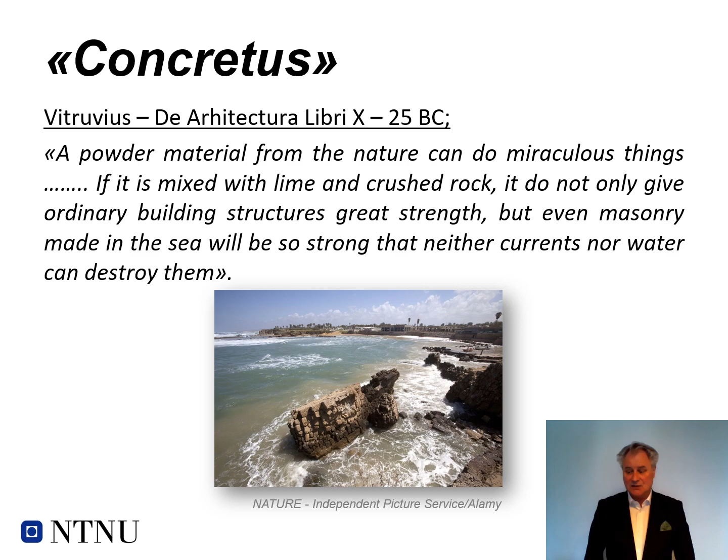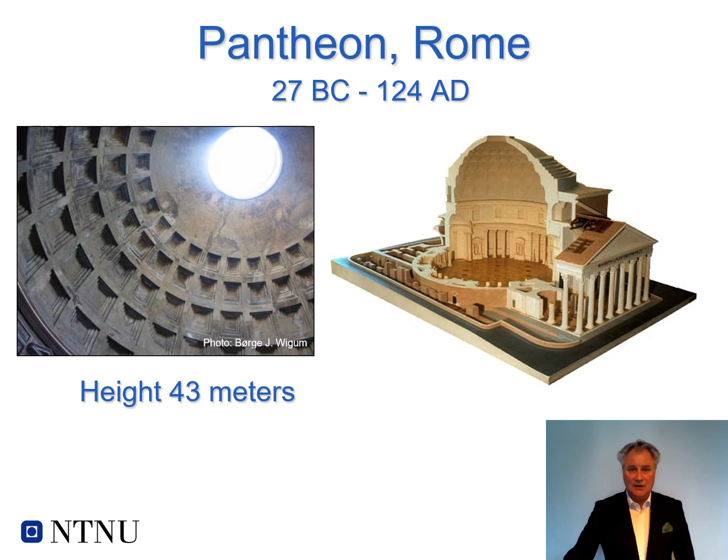Concrete is a flexible material. You could shape it in the way you like, and it's very strong and very durable. In Norway, we have quite a challenging infrastructure, with roads along the coastline, etc. So in that sense, we are very dependent in Norway on using concrete as a durable material.

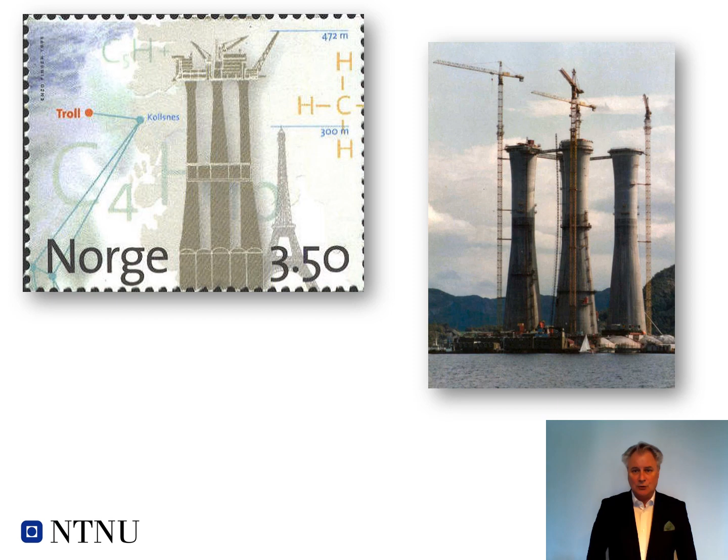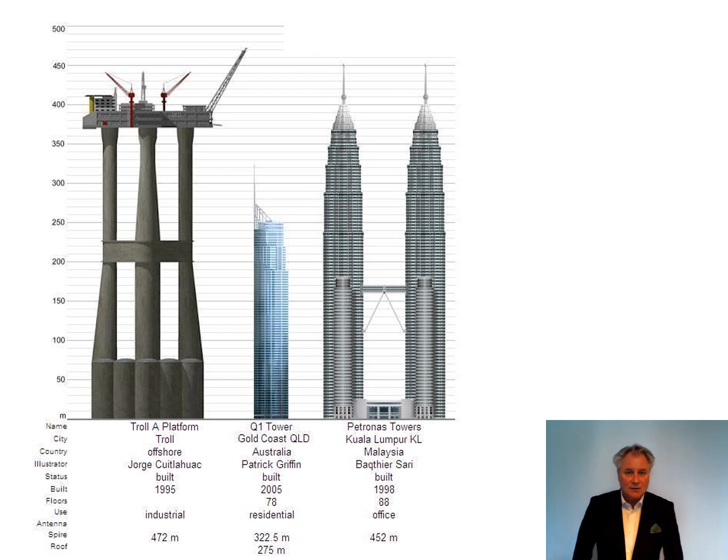Also, when we started to drill for oil in the North Sea, we needed some big structures. We built the Troll platform, which is actually the biggest ever movable structure in the world. As you can see here, compared to the Petronas Towers in Kuala Lumpur, the Troll platform is more than 400 meters high.

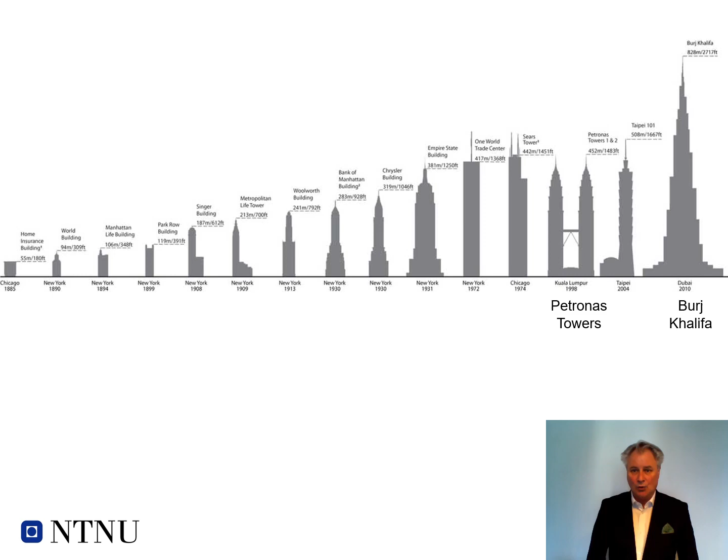However, comparing the Petronas Towers with other buildings made of concrete in the world, you see that even the Petronas Towers are relatively small compared to the biggest or highest building in the world, the Burj Khalifa Tower in Dubai. The Burj Khalifa Tower, with its 828 meters height, needed more than 330,000 cubic meters of concrete, equal to around more than 37,000 trucks of concrete to build this structure.

But what made it very special in this structure is that even though it was built in the sand desert of Dubai, they needed to import sand from Australia for use in this concrete. Quite remarkable.

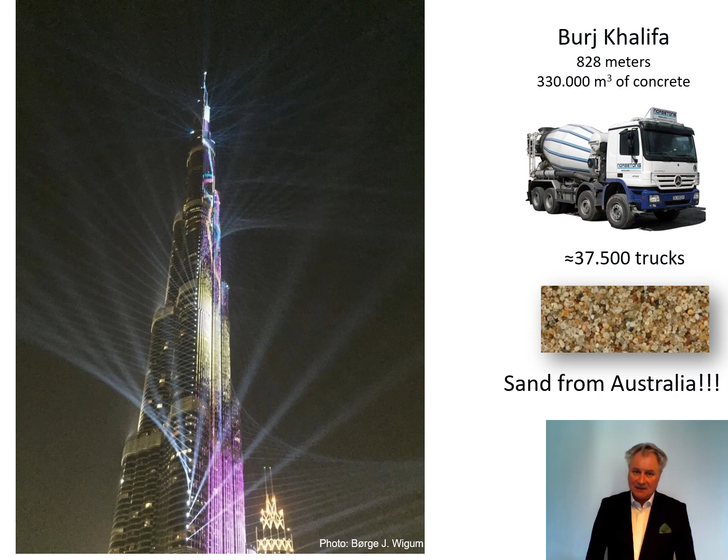So today we're talking about concrete, and concrete is the second largest global commodity by volume in the world after water. Every year we are casting a typical 3.5 tons of concrete per capita in the world, which equals around 1.5 cubic meters. That means up to almost 25 billion tons for the 7 billion population of the world.

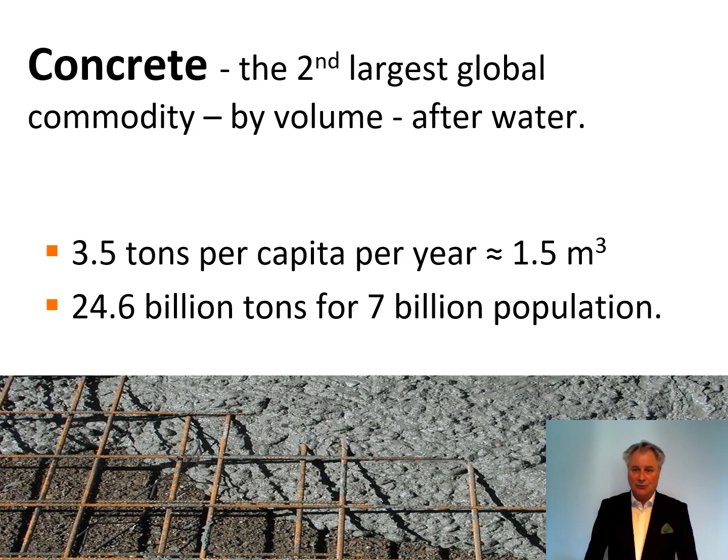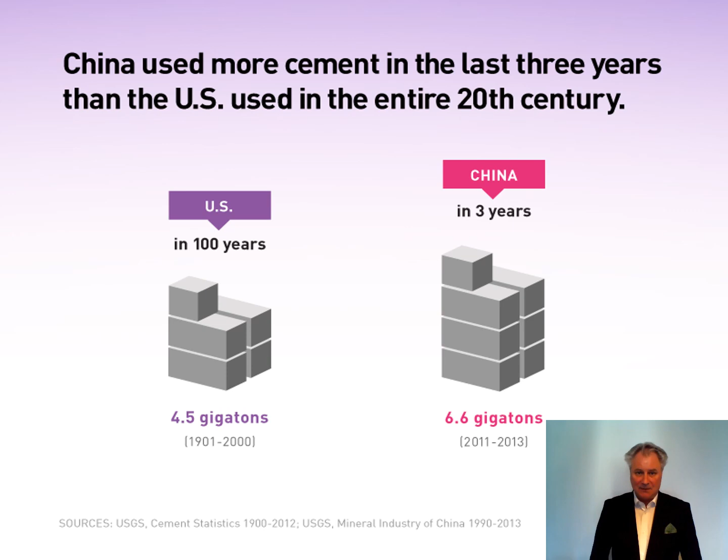So we see a big development in the use of cement, and let's look at how concrete is built up. Concrete, of course, is glued together with the aggregates, and the glue is the cement and the water.

A typical concrete mix could look something like this for 1 cubic meter. You have the cement, around 350 kilos. You could have a coarse aggregate, which could be 16 to 22 millimeter particle size, almost 600 kilos. And you have the slightly finer coarse aggregate, 8 to 16, around 330 kilos. Then you have the sand fraction, typically 0 to 8 millimeters, around 945 kilos. And then you add the water to the cement, giving a water-cement ratio, in this case around 168 kilos of water.

In addition, you could have some different admixtures, etc., and you end up with this concrete mix with a typical density of 2,380 kilos per cubic meter. Please note that the aggregate is a very important part of the concrete, as it counts up to 70 to 80% of the concrete. So this is the typical mix of concrete, and as you realize, the aggregate part of the concrete is definitely very important.

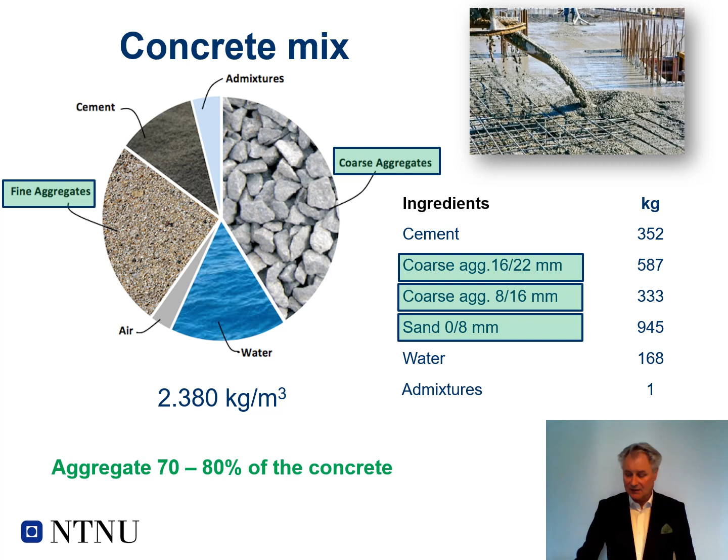Why is it important to know about concrete aggregate? Well, aggregates are approximately 70 to 80% of the volume of the concrete, so they will be critical for the properties of concrete, both in the fresh state, during setting, and finally in the hardened state. We'll come back to that.

We've also seen that concrete strength has increased in recent years with all the new infrastructure - platforms, bridges, dams, etc. There is more demand on the strength of the concrete, and consequently the quality of the aggregates used is more critical.

We also see today more focus on durability aspects. We want the concrete to last, like the Romans, for decades and longer. So we are looking into, for instance, freeze-thaw durability, and there has been particular focus on alkali aggregate reactions during the last 20 to 30 years in Norway.

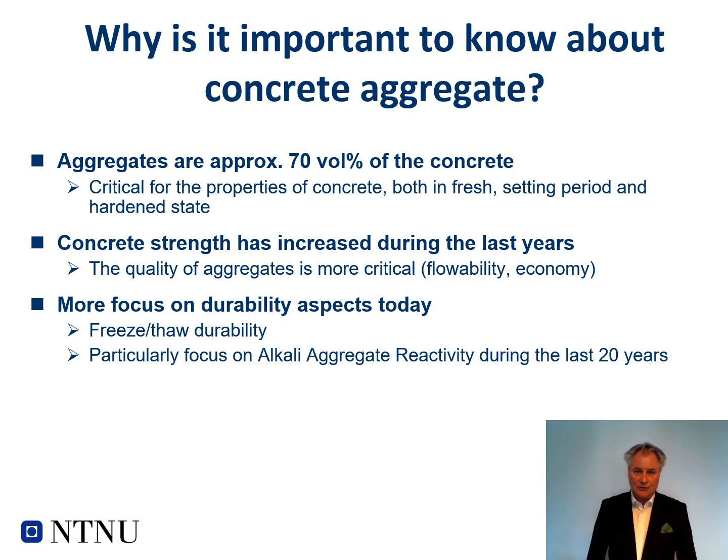Please have a look at another presentation where I'm particularly focusing on the alkali aggregate reactivity of aggregates in concrete.

It is also important to know more about concrete aggregates because there's increased competition with other materials, and we need to look into the economical benefits of concrete materials, etc.

We've also realized that even though we have a lot of bedrock all around, we've had in Norway a lot of natural sand and gravel after the Ice Age. But we are now realizing that many of those resources are depleting around the main markets, the main cities, and so on. So we are seeing an increase in use of crushed aggregates, even in the sand size fraction, which we call manufactured sand.

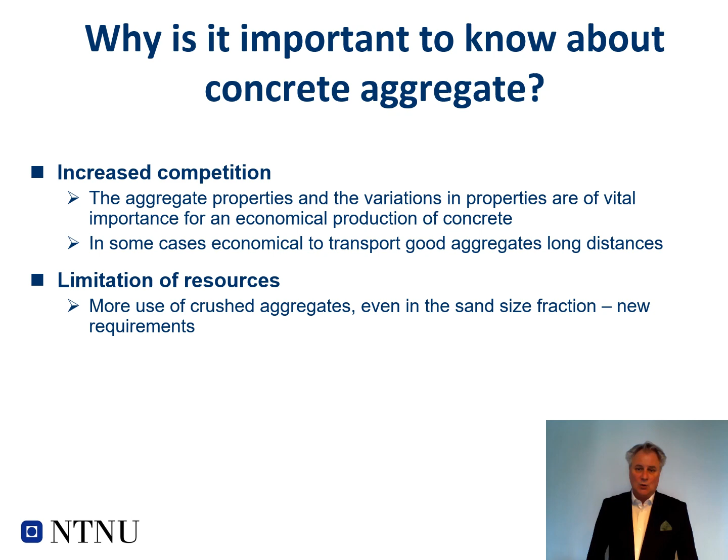And for these new crushed aggregates, there will be some new requirements and new challenges, as well as for typical aggregates for concrete.

When we are talking about fine aggregates, this is what we call sand. By geological definition, sand should be less than 4 millimeters, but typically in the concrete industry they talk about sand less than 8 millimeters. As I said, up to now in Norway we have had typical natural sediments - glacifluvial and fluvial sediments - that have been used.

But when using natural sands, we do need to take the petrographic composition as received, because it will be a mixture of different rock types that have been crushed down and sorted by glaciers and rivers. We have typical gradings used in the concrete industry, such as 0 to 4 millimeter grading, 0 to 8 millimeter grading, and so on.

And in addition to this natural sand that has been used for decades, we also now realize we are able to crush bedrock and produce manufactured sand from that bedrock.

Then we have the coarse aggregate used in concrete. By definition in geological terms, coarse aggregates are coarser than 4 millimeters, but more typically in ready-mix concrete production we are talking about coarser than 8 millimeters.

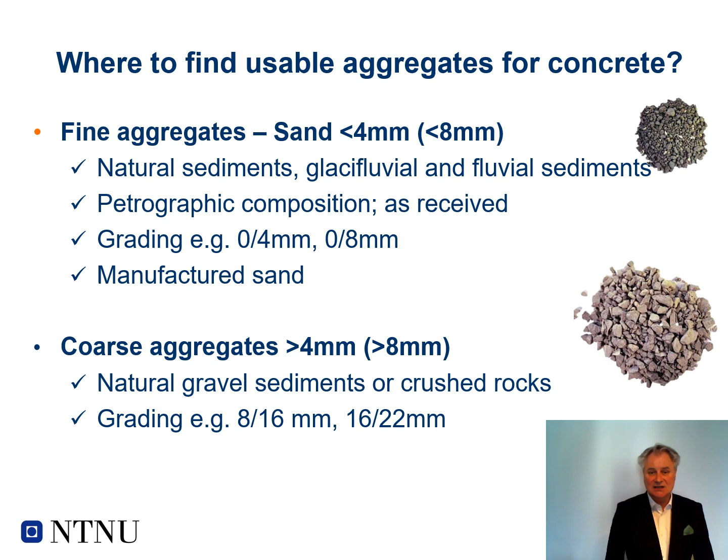We could also have used natural sediments, natural gravel, but it's more and more common to use crushed rocks for these coarse aggregates. Typical gradings could be in the range of 8 to 16 millimeters and 16 to 22 millimeters, and so on.

So what kind of factors will govern aggregate quality? First, we have the geological origin, of course - the bedrock, the type of minerals in the bedrock, etc. So that is the rock itself.

Then for natural sand and gravel, we have the transportation and deposit conditions and so on - what happened when the natural sand and gravel were produced.

For bedrock and minerals, there will also be some metamorphic processes, so there can be contaminations and deteriorations of minerals, clay minerals, etc. That is the geological origin of the aggregates, and in many ways it's difficult to do anything about what the geological history has been.

Then during the production and refining of bedrock into aggregates - by crushing, screening, quarrying - we have a lot of possibilities to increase and impact the quality of the aggregates regarding the shape of the particles, the grading, and so on.

But even when you have produced your aggregate, you have to handle it and store it. Even though you've produced good quality regarding shape and grading, during handling, when building up piles, there could be some segregation of the original grading, some crushing of the grain producing fines, and some contamination - both during handling and during transport of the aggregates to the ready-mix plant. So there are many things that could affect the final quality of the aggregates.

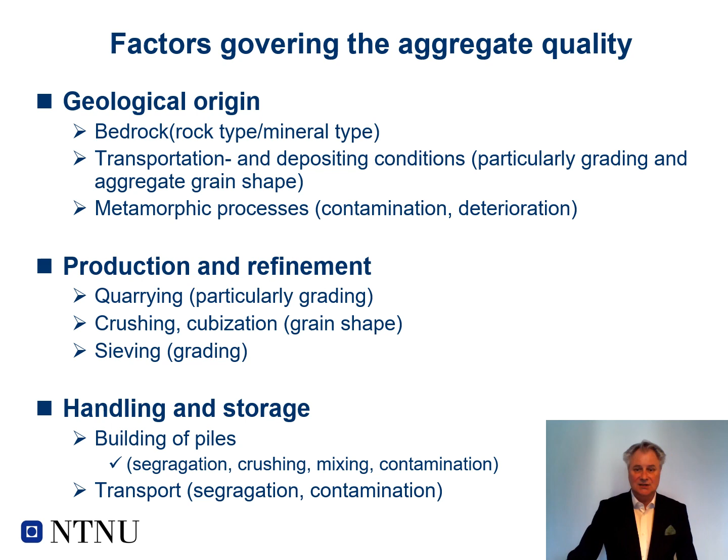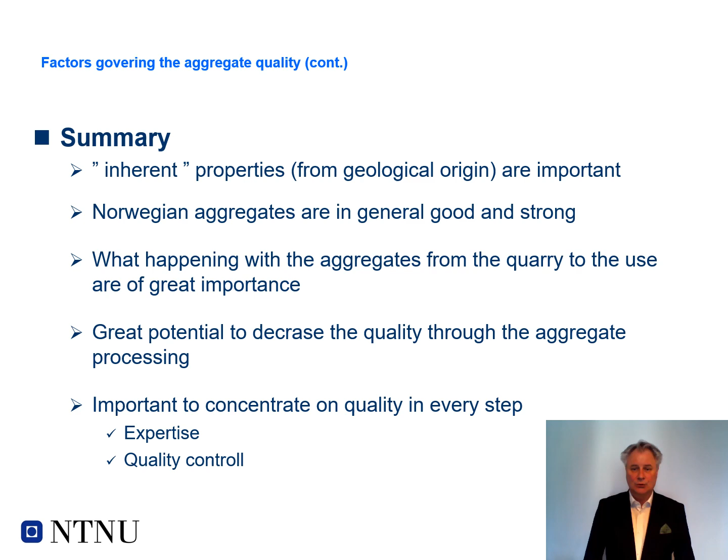In summary, the inherent properties from the geological perspective are of course important. In Norway, we have very good and strong natural aggregates and bedrock aggregates. But what we do in the quarry up to the final use is of great importance, and we need focus on quality throughout the whole process. We need expertise in how we produce or process the aggregates, and very good quality control all the way to ensure the quality of the aggregates.

When you've produced your natural or crushed aggregates and you're using them in the concrete mix, the aggregate itself will influence the concrete properties in 3 different stages. The first is the fresh state, when the concrete is plastic and flowable, and you're putting it into the mold and pumping it. The second is the hydration state, when the concrete starts to harden, with a setting time until it hardens. Eventually the final stage is the hardened state, where the concrete is finished and developing strength, and hopefully it will be durable.

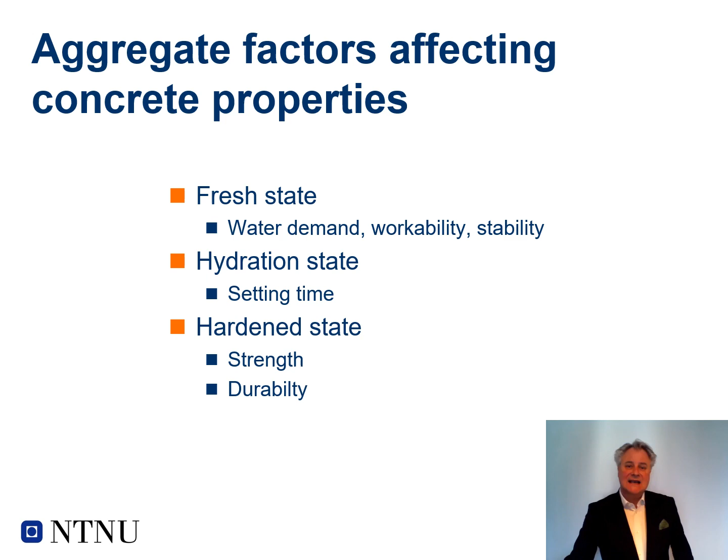Let's look at those 3 different stages, starting with the fresh concrete. This is when you are mixing the concrete at the batch plant, bringing it to the building site, where you want to pump it and pour it into the mold so it's flowable without any segregation. In that stage, the grading of the aggregates is of great importance, particularly for the sand. I'll come back to that.

The grading will affect many parameters of the concrete, including the water demand - how much water you need to add to make the mix flowable. If you add more water, you have to add more cement, and adding more cement increases the possibility of shrinkage when the concrete hardens, because the cement paste shrinks. Adding more cement also affects the economy. So the water demand is important, and it's directly affected by the grading.

The grading also affects workability - how flowable it is. You want it to flow, but you want it stable, with no segregation between different fractions. For instance, if you're adding air to increase freeze-thaw durability, you want the air content well distributed, stable, and robust. The grading impacts all those factors. There's probably no such thing as an optimum or best grading - it depends on different rock types, different types of concrete, etc.

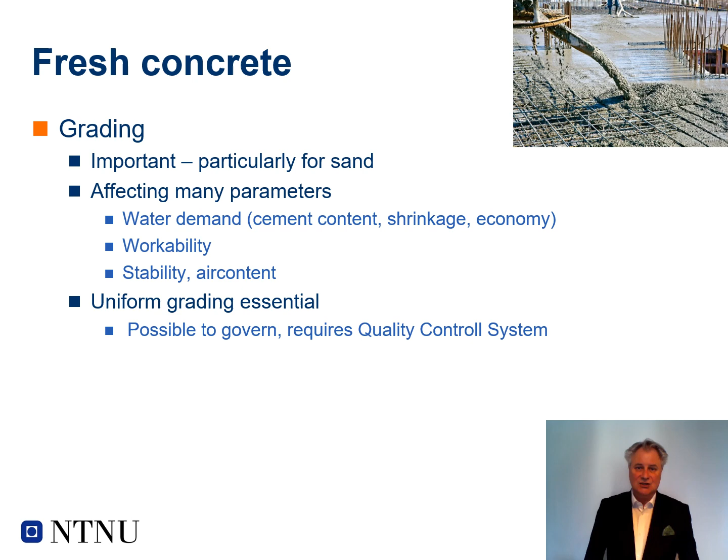What is important is to try to have a uniform grading - the same grading day after day, whether it's raining or sunny at the plant. To achieve uniform grading, it's very important for an aggregate producer to have a very good quality control system. So grading is a very important property in the fresh state of concrete.

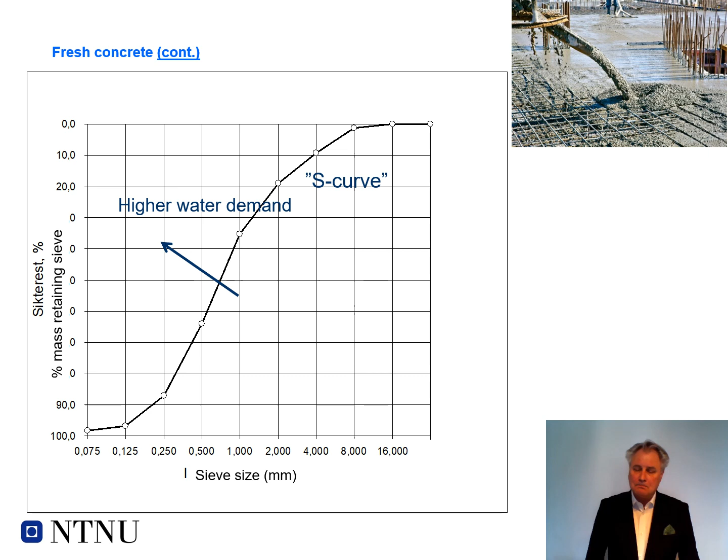A typical grading could look like this. For a natural aggregate, it will always have this type of S-curve, as you can see here. This S-curve leads to higher water demand in the concrete. But maybe even more important is the variation in the fine content of the mix - down around 250 micron and below, we're often talking about filler from 125 micron and down. If you have variation in this grading, that's of great importance for the properties in the fresh state.

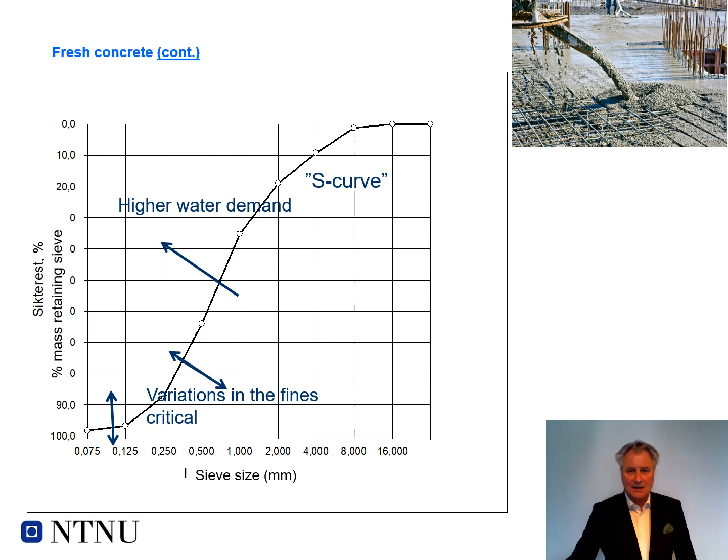As an example, here's work by Rolands Cepuritis, who finished his PhD in 2016 at NTNU in Trondheim. He looked at different types of aggregate, manufactured sands, and so on. In this case, he took the same aggregate from 125 micron and coarser - the same grading, so it's not shown here. But from 125 micron down to finer, he used two different fillers, two different fines: the orange one is crushed washed fines, while the green one is crushed unwashed.

You can see that on 60 micron, the washed one has less content of fines compared to the unwashed. Coming down to 20 micron, these are very fine particles. You can see the washed curve got only 10% less than 20 micron, while the unwashed curve gets less than 20%, double the amount below 20 micron. As you can see, it's a big difference on the slump or flowability. The unwashed one with a higher filler content gets a much stiffer concrete compared to the washed filler, with less content of the finest particles.

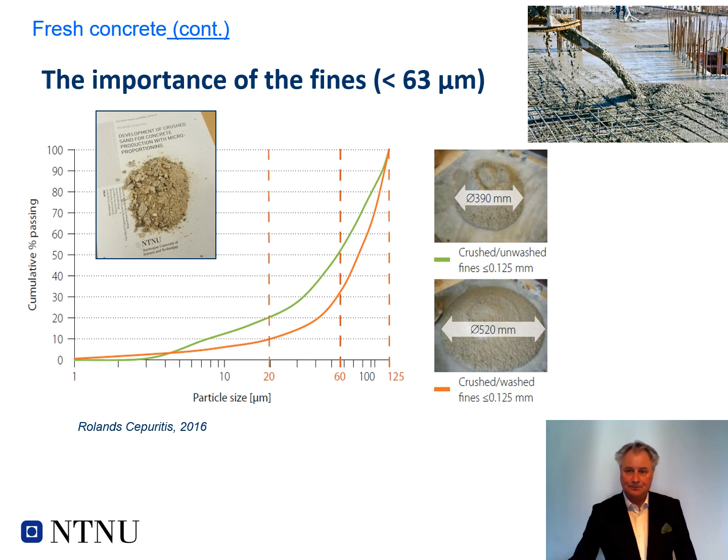Another example from Sweden, where in a quarry they first included the fines that were created by the blasting. This is also crushed sand used. When they included the fines from the blasting, they got a very stiff concrete. With exactly the same mix recipe, but removing the fines from the blasting and only having the fines from the crushing production, you can see they have a completely different, more flowable concrete.

So this is very important to remember, that the fineness of the filler in an aggregate will have a very big effect on the flowability and the rheological properties of fresh concrete.

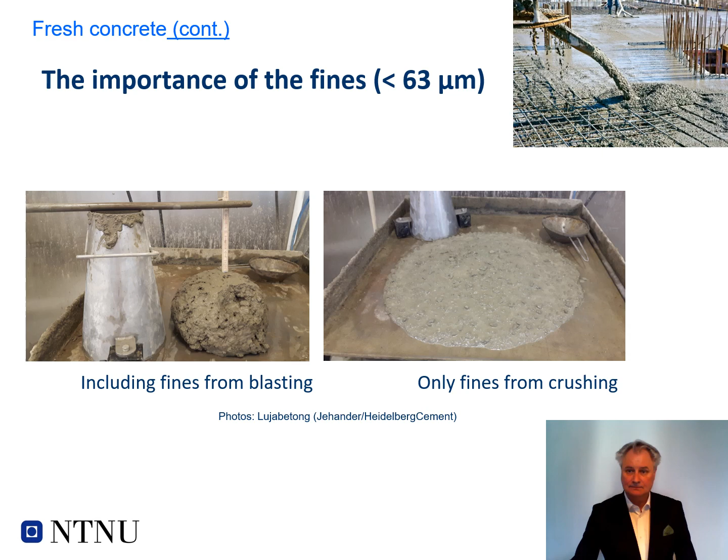In addition, in fresh concrete, you have the shape of the aggregate particles. Of course, you want more cubical particles, which will make the concrete more flowable, and you need less cement to let the cubical particles flow around. So cubical particles will always be better than flaky particles.

In some Norwegian rock types, we do have a lot of mica minerals. Mica minerals like biotite and muscovite are very flaky minerals. So when you start crushing down your bedrock, particularly into manufactured sand, you could increase the content of free mica. When the mica is inside the particle, there is no problem. But when you start crushing free mica, those particles will have a very high specific surface area because they are very thin and flaky. So those thin flaky minerals need more cement paste to cover them. Free mica is a problem in manufactured sand, and it will increase the water demand and make the concrete stiffer and less flowable.

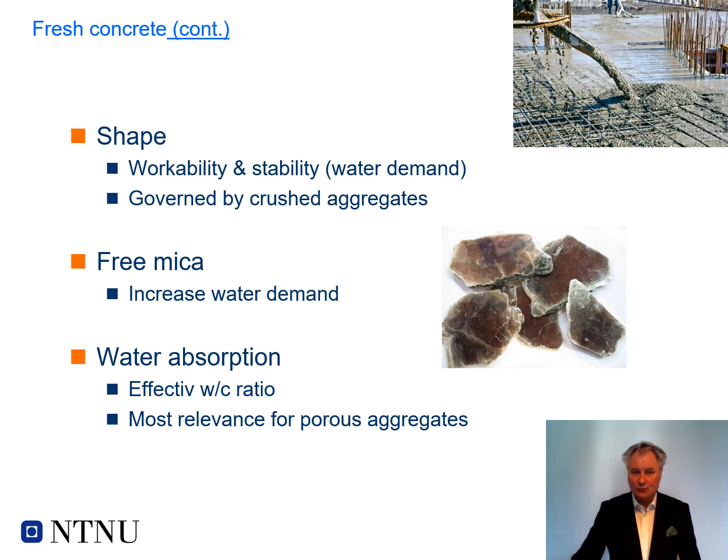If we continue to the setting time, which of course is only a few hours, when the concrete goes from the plastic flowable state into the hardening state, there could be some aggregate properties that have effects on the concrete. First, if you are using natural sand, it could have some contamination of humus or organic things, and those humus could have a negative effect on the setting time. They could have a retarding effect, so the setting time is postponed and takes longer, and that may also affect the final strength of the concrete.

In addition, when the cement is setting, it develops heat, so the concrete gets warmer, and we do not want the concrete to get too hot, because that could lead to cracking due to temperature, and could also lead to other negative effects. So if you have a very massive big concrete structure, like a dam or a very big foundation, there could be a big heat development in that concrete. One way to reduce that heat development is to use a heavier aggregate with higher density, which will have a higher heat capacity, reducing the heat development in your concrete. So in certain examples or cases, you could select an aggregate with higher density to reduce heat development.

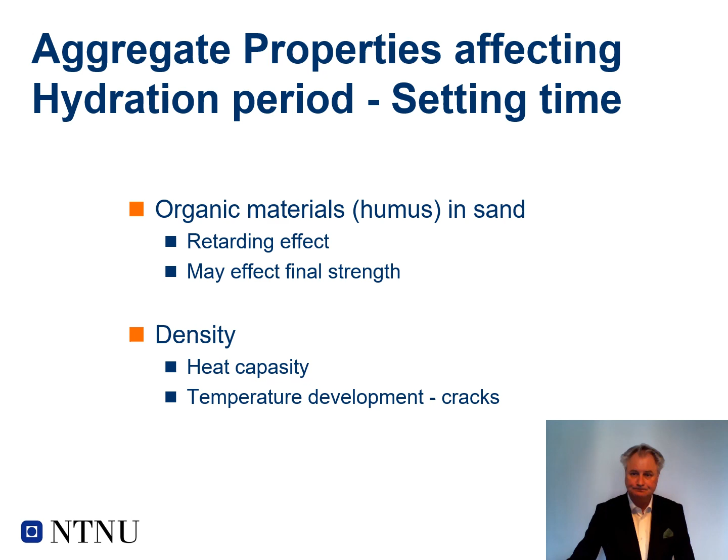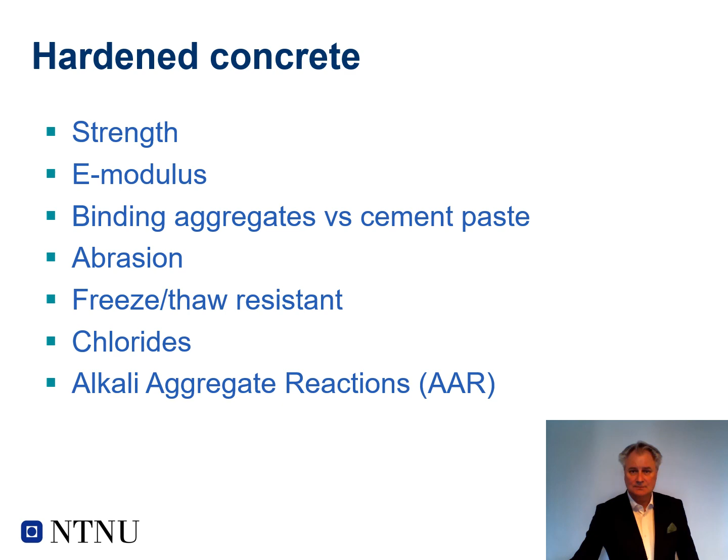So as a summary of this presentation, I have tried to emphasize the importance of aggregates in concrete. Aggregate is the major part, up to 80% of the concrete, so aggregate is not there just to fill in - it's the major part of the concrete, and the cement and water glue everything together. We have realized that the quality and properties of aggregates very much influence the properties and quality of the final concrete product.

So in a way, you could see that inexpensive or bad quality aggregates could lead to more expensive concrete. Because if you have a bad quality aggregate, for instance with unhomogeneous grading, bad shape, lots of free mica and so on, you will get a higher water demand, requiring more cement to be added into your mix. You need that extra cement to maintain the water-cement ratio and strength requirements for your concrete. That results in more expensive concrete due to the higher amount of cement, which could also lead to higher potential for shrinkage.